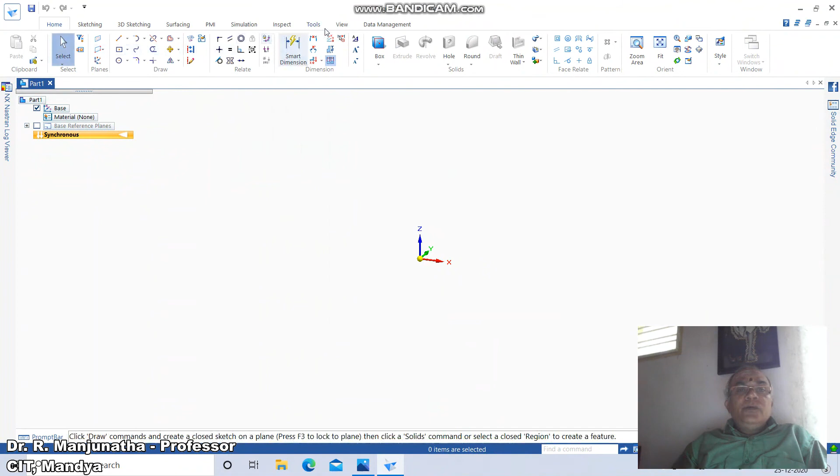So to do that, go to tools, click on ordered, and then disable base, enable base reference planes, then go to home, click on sketch, click on the right plane, and then click on project to sketch.

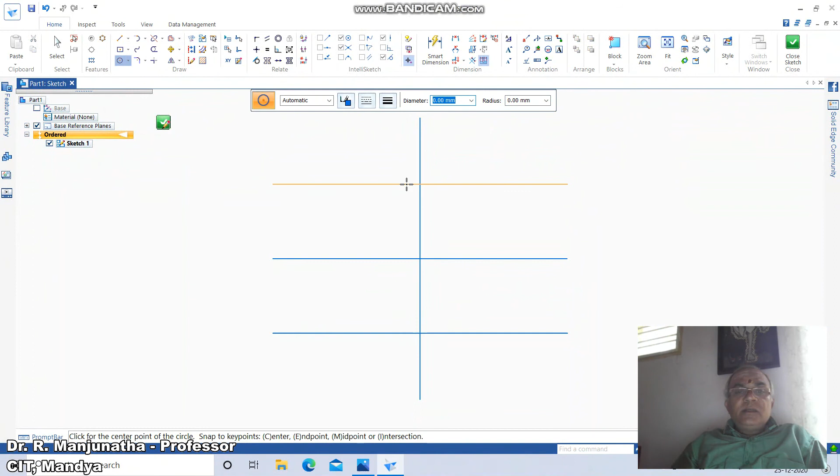So click on OK, you select these two lines, then go to offset, take the distance as 30, select on this side and also on this side, and go to circle, take the intersection of this and take the diameter as 20, because the radius is 10, so you take this also, then go to offset, take the offset distance as 10, and you select it on this side and on this side.

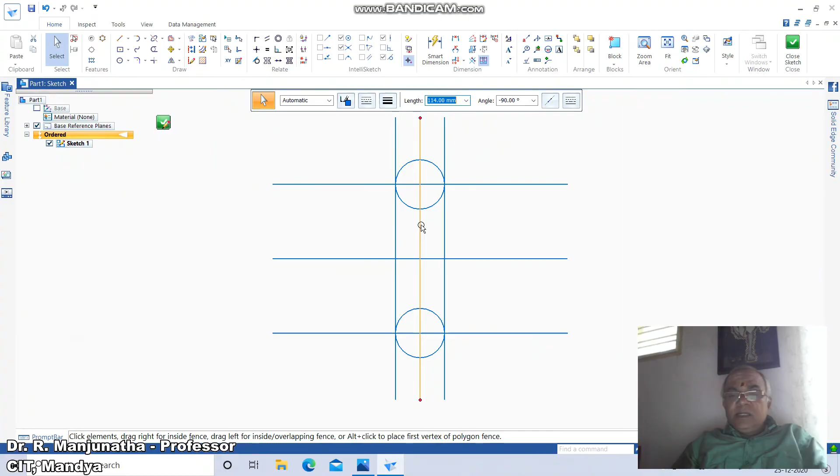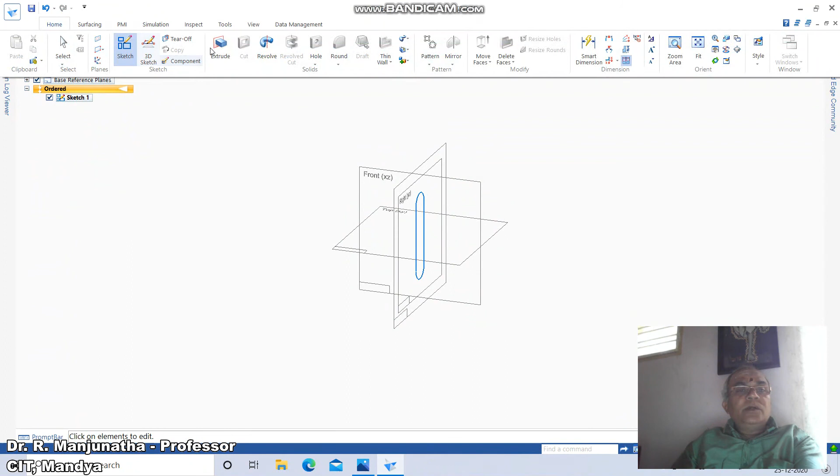Then go to select and delete these center lines, then go to trim it on this and this, and similarly you delete this line and trim it here and here, and then go to close sketch, then go to home, click on extrude, click on this, accept it and give the extension as 22, accept it.

Then go to finish. Now we'll go for the next option, which is I need to create this cross section which has been given here, which has got the extrusion of 33 mm on either side. So to do that, I'll go to sketch, click on front plane, and then go to project to sketch.

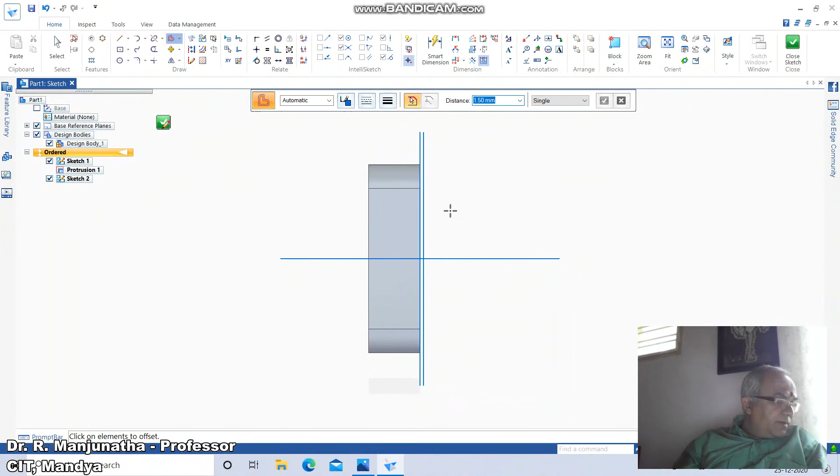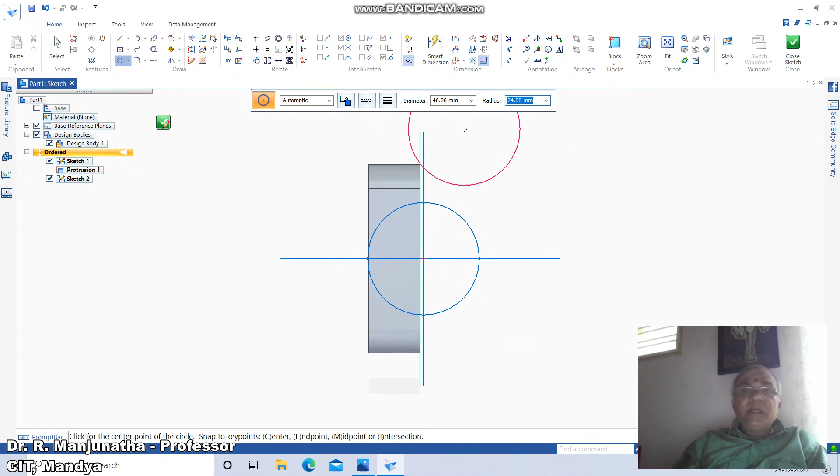Okay, you click on this, and here he says take the offset distance as 1.5. You take it from this side, and then go to circle, click on the intersection point of this, and here he has given diameter 48. So here the diameter is 48. Then again you need the radius of 29. You just give 29 and click on the same intersection point, that is the center point.

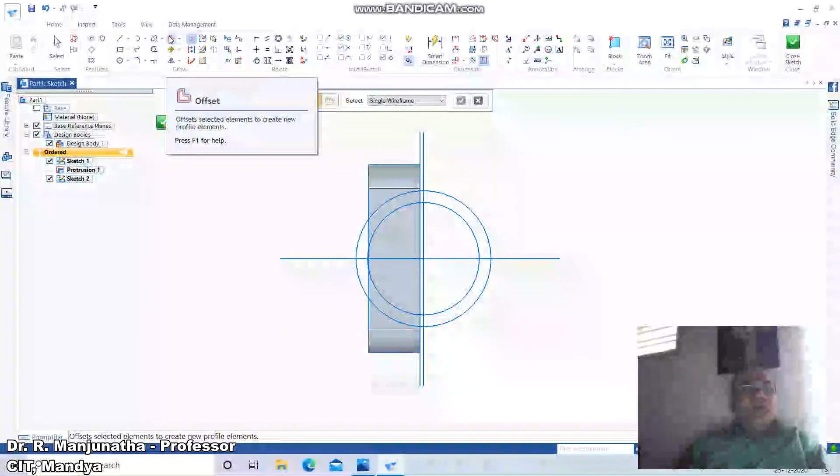Then on either side, go to project to sketch, click on OK, you just click on this, then click on this and also on this, then go to offset, you take the offset distance as 3 mm. We can see here this distance is 3 and this distance is 3, so take the distance as 3, and offset it on this side and also on this side.

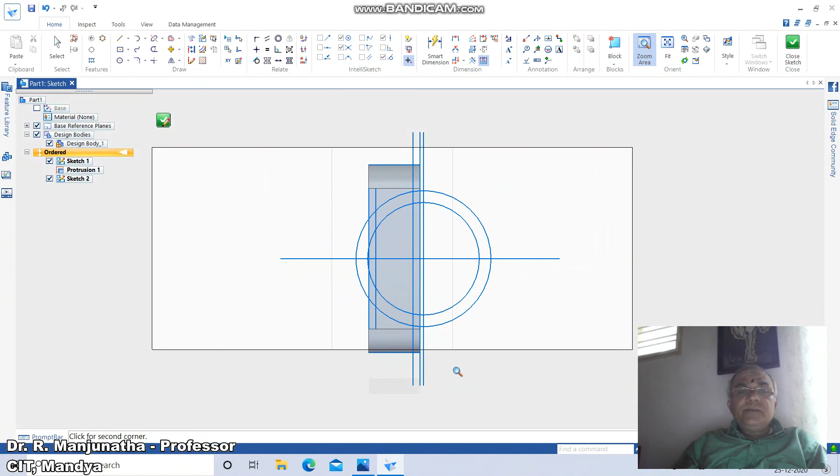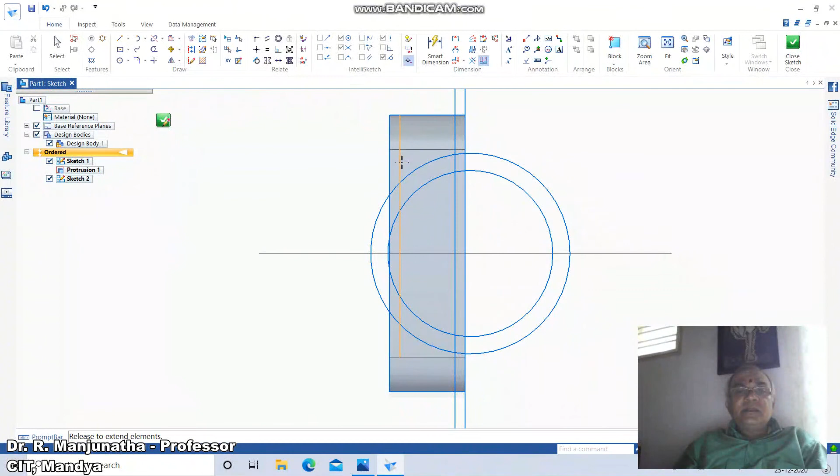Then go to zoom area, and bring it near to the screen, and you delete this line, it's not required. Similarly, it's not required on this side. Then go to trim corner between this and this, and between this and this. Then go to extend to next on this line and also on this line. Then go to trim this portion and this portion and this portion, and this and this and this, you trim it.

Then go to zoom area and bring it near to the screen, and then go to trim on this and this and this, similarly on this side. Sorry, you just go to extend to next. So now this portion is over, so go to trim here, then go to trim corner between this and this, and between this and this. So what we are trying to do is join the vertex points so that you get a single entity.

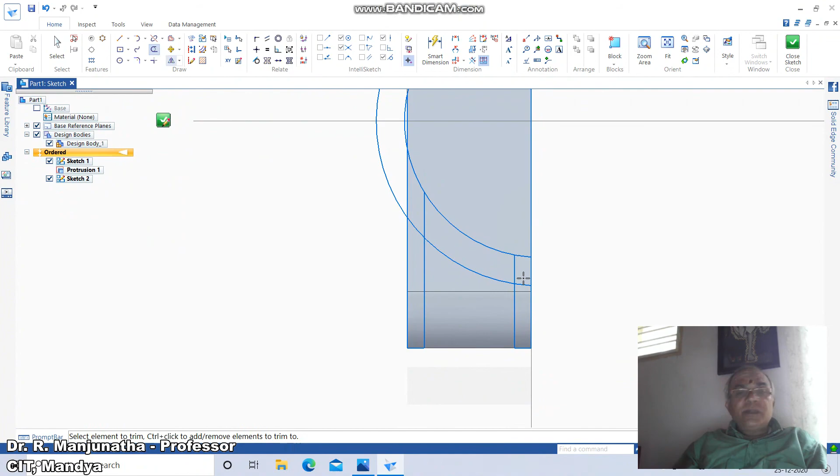Once you do that, come down to the bottom area here. Again you do the same thing. Go to trim, it is already trimmed here. You just trim this portion and also this portion, and similarly, go to extend to next on this side, and then trim this portion like this. Similarly here and here and here. Control Z. So go to trim, trim this line, Control Z. So trim this portion. Okay, now you trim this portion.

So again you need to join trim corner between these two, between these two, between these two. What I'm trying to do is just create the portion which is required for joining, so that means the zoom area.

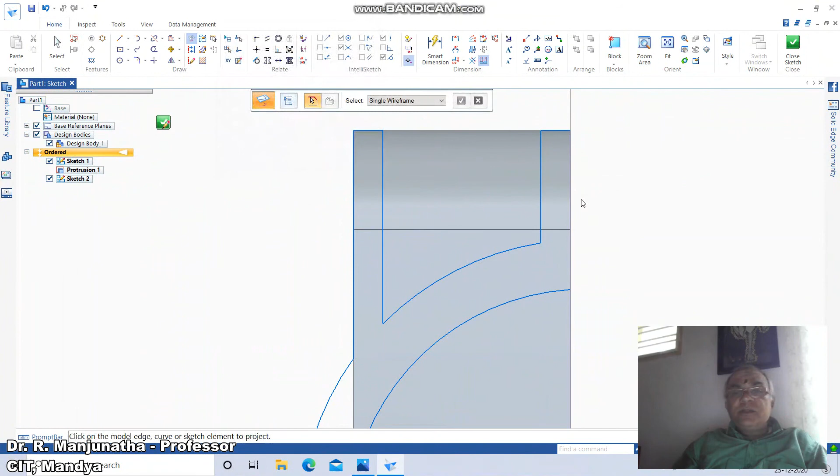Here we need to create this now. So you go to project to sketch, accept it, click on this, then go to trim corner between this and this, between this and this. Now that we've created this particular area, go to close sketch.

Then click on home, click on extrude. Click on this profile, accept. Go to symmetric extent on either side and then give the value of 33. Then you will get this portion. Then click on finish.

So once you do that, the next portion will be to create this profile and take out this portion. To do that, I'll go to home, click on sketch, click on this, then go to circle, take the center point of circle of radius. Here what he has given is diameter 20.

Then go to project to sketch, click on this and you click on this, then you click on this. Then he says it is of the radius of 30.

So go to offset, take the offset command, give the distance as 30, and from here you draw this, then go to trim corner between this and this, this and this.

Then go to line and click on tangent. Tangent is there, so you take the intersection part of this to tangent to this. Similarly, you take the intersection point of this to tangent to this.

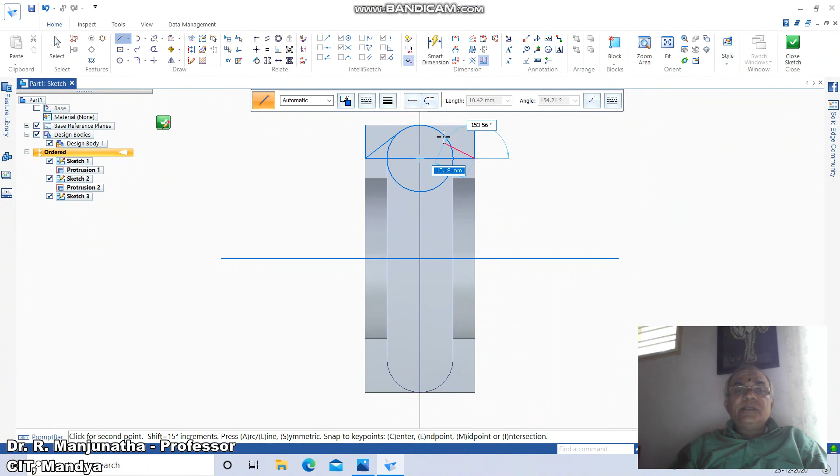Tangent. Then go to delete, select this portion and remove it, then take some arbitrary line somewhere here so that it is taken outside this box, and then go to trim this portion, and then go to trim corner between these two, between these two, between these two, between these two, between these two.

Now I need to mirror this. Just take the mirror command and take this as the window, select this, then go to select and remove this and keep it here. Then go to close sketch.

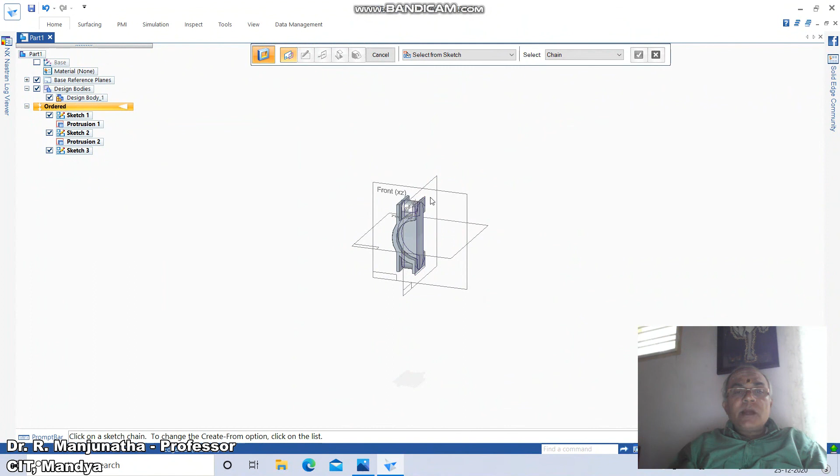So click on home, click on cut. Just click on this and also on this side, and cut it till here so that you are going to get the entire portion.

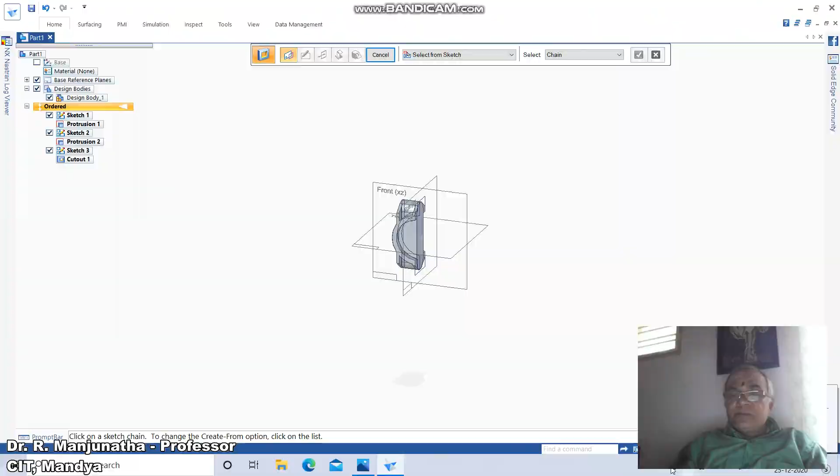Now we need to go for this portion, which is the rib, which you need to extrude as a protrusion. What I need to do, to do that, first I will sketch. So click on home, click on sketch.

Click on the front plane. Why do we need to take the front plane? Because it's exactly at this center. Since it's at this center, that center will be here.

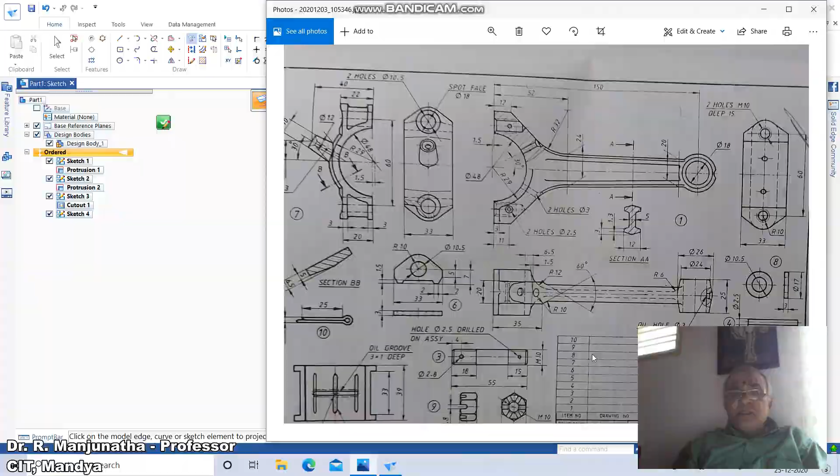So go to project to sketch, click on OK. Click on this horizontal line and this perpendicular, that is the vertical line, and the reference of this hole or this protrusion is 13.5 from the horizontal and 40 mm from the vertical.

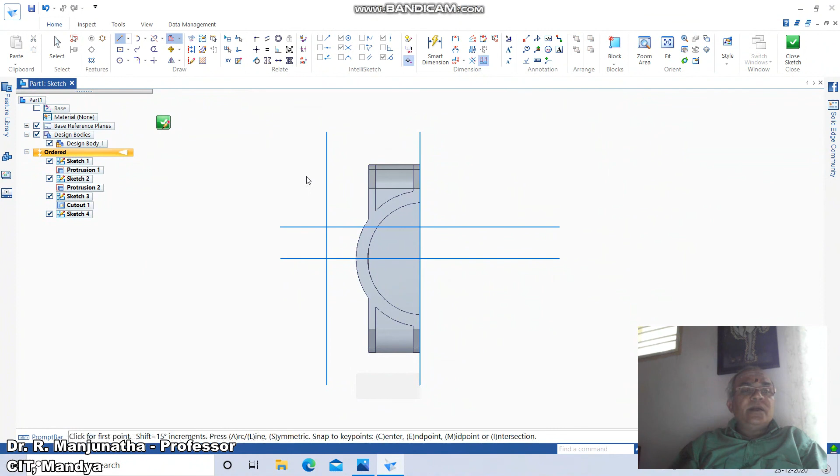So you just go to offset, take the distance as 40. From here you take the distance and then you have 13.5 from the horizontal direction, and then go to line command and draw a line from intersection to take around 100 mm distance.

Angle is minus 30 because the angle he has given is minus 30. So with reference to the vertical, the horizontal also will be minus 30.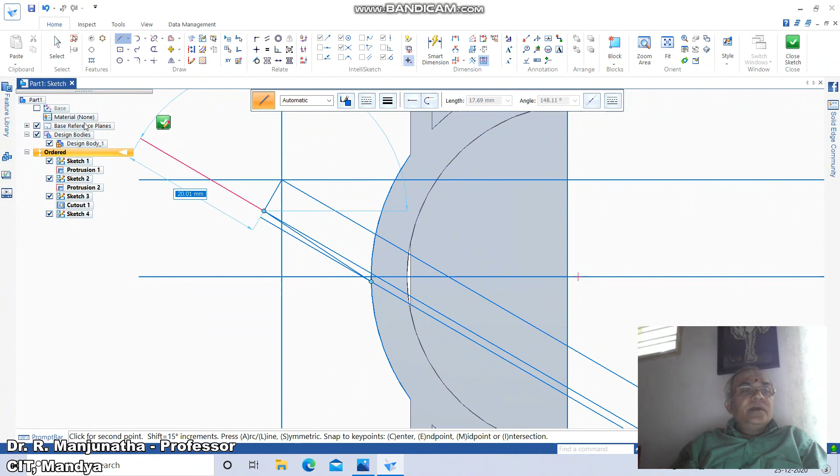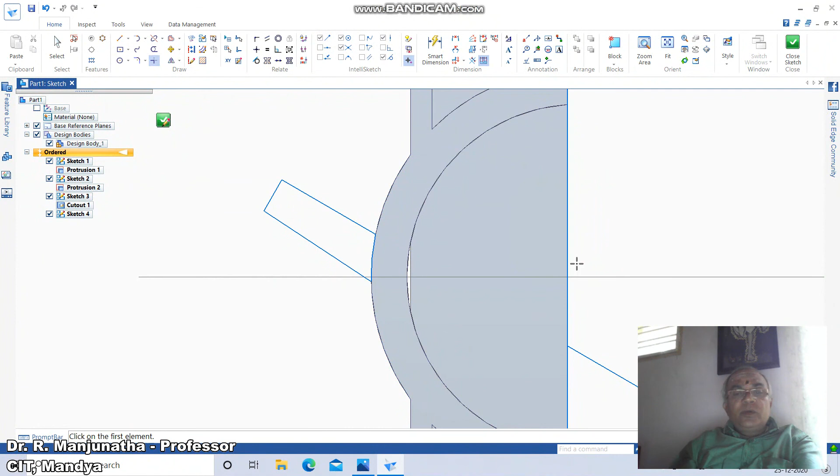Then go to select and remove this line, and similarly remove this line, and remove this line, which are all the ones not required. Remove it, then go to trim till here, and then trim the corner between these two, and between these two.

So once you get this, delete this line and also delete this line, then go to fit and see if there are any other lines remaining. No, there's not. Just go to close sketch.

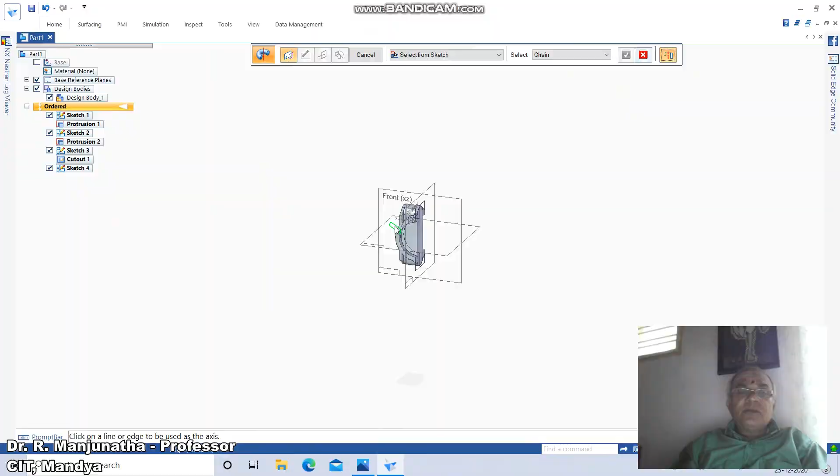Then come down to home, click on revolve protrusion. Click on this, accept it, click on this reference axis, and revolve it to 360 degrees, then say finish. This is how you get this portion.

Now we have done till here. Now I need to create a hole here. Go to home, then go to hole, click on this plane, and then click on this.

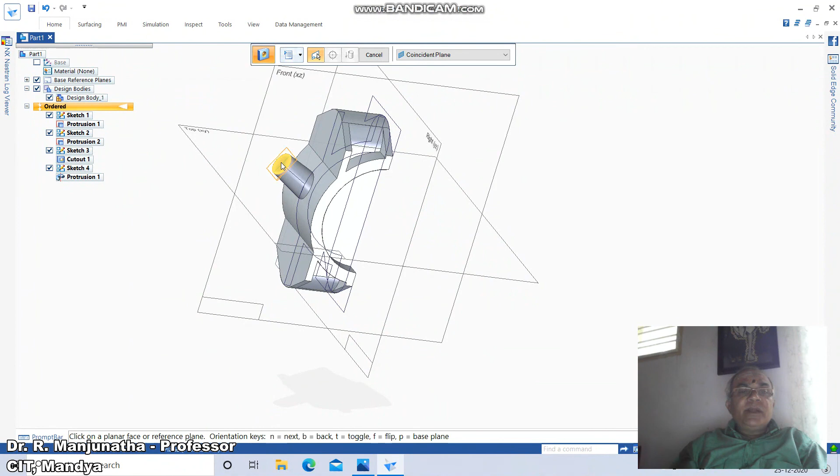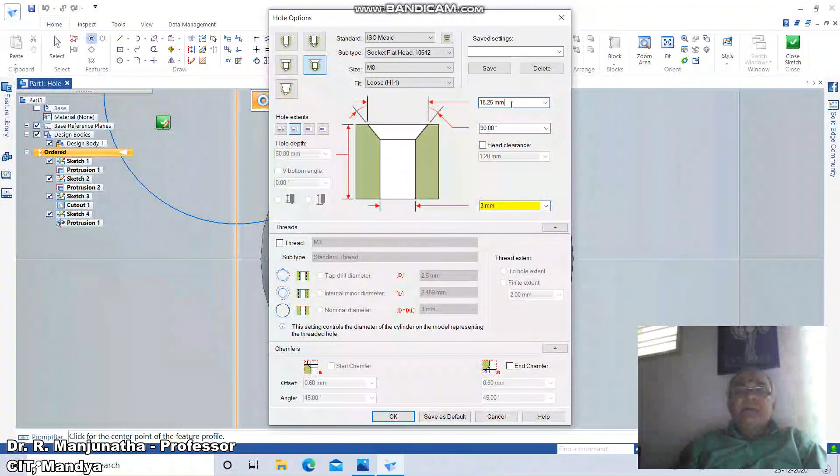Come down to the hole option, countersunk. Take the countersunk diameter - the diameter of this hole is 3 mm, and then the countersunk diameter is 5, and the countersunk angle is 90 always. Then click OK - why is it not a valid input? It says the diameter is 3 and the countersunk diameter is 5.

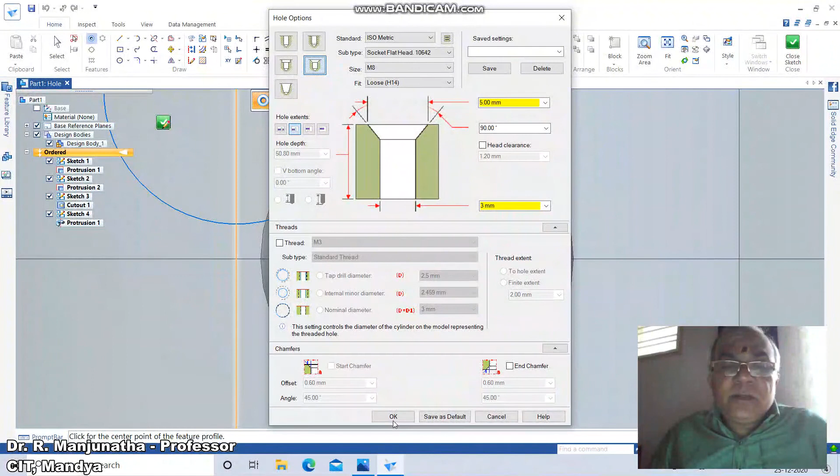Come down to ISO Metric, then come down to countersunk, click over this - all options, go to countersunk, and the diameter is 5, and there's the countersunk angle. Click OK, then come down to this, take this intersection, click close sketch and say finish. So once you get this, now we go for the hole.

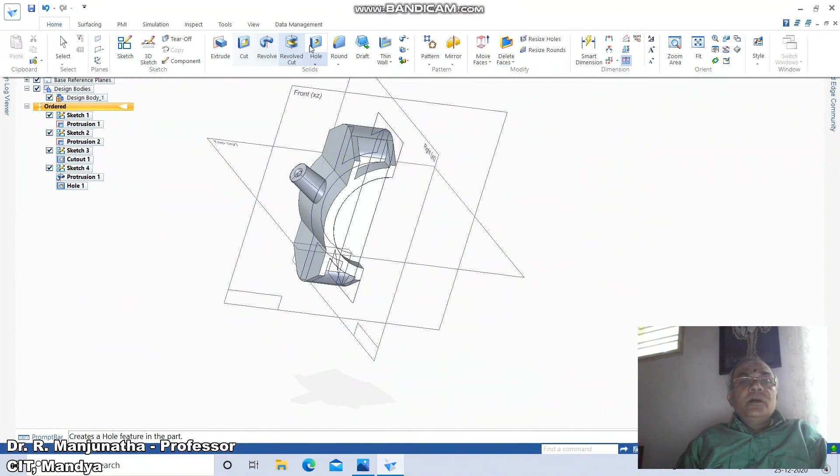Again go to home, click on hole, click on coincident plane as this plane, then come down to this. Again take countersunk. This diameter is spot face of diameter 18, and this inside diameter is 10.5.

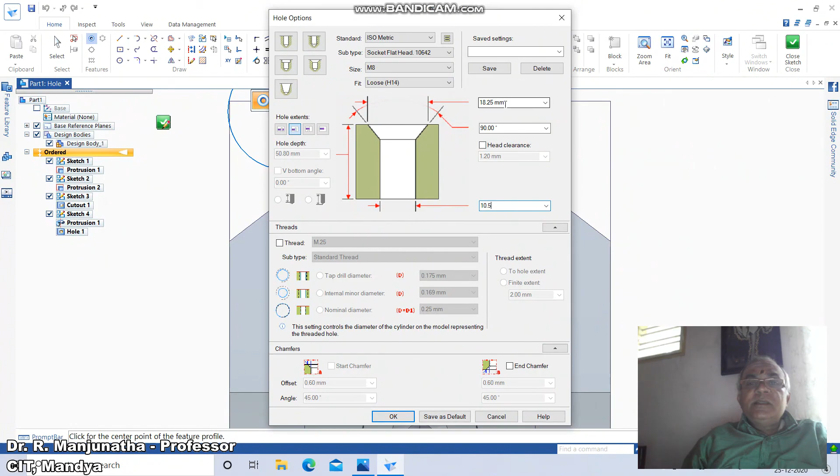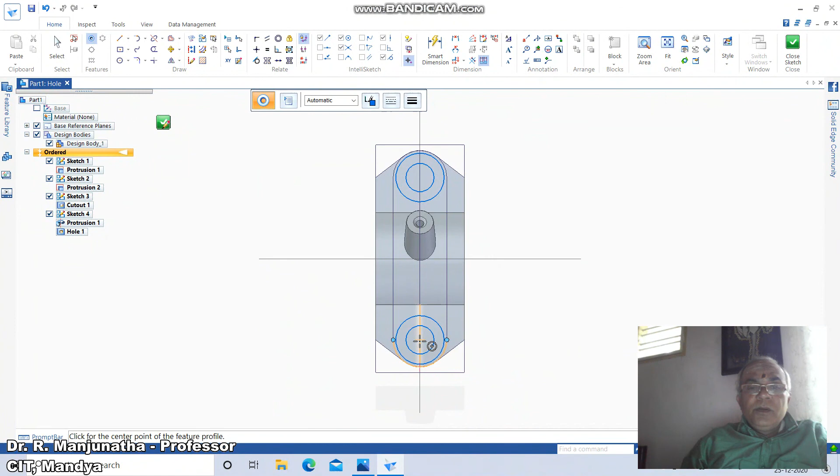So take this as 10.5, and then this as the diameter, which is spot face to diameter 18. Type 18 mm, and the countersunk angle is this. Click OK and take the center point of this, and similarly when you fit it, take this countersunk of this also. Once you get this, click close sketch and click finish.

Now we got this. Then go to fit, then go to rotate. Now when you rotate this, you have this hole.

Now again we need to do this operation - go to home, click on hole, click on hole options, planar face on this plane, then come down to this, and here I need to go for a hole. Since it is a simple hole, what I need is the diameter of 48 mm. We need to consider this 48 mm diameter, and it is through next, or through all.

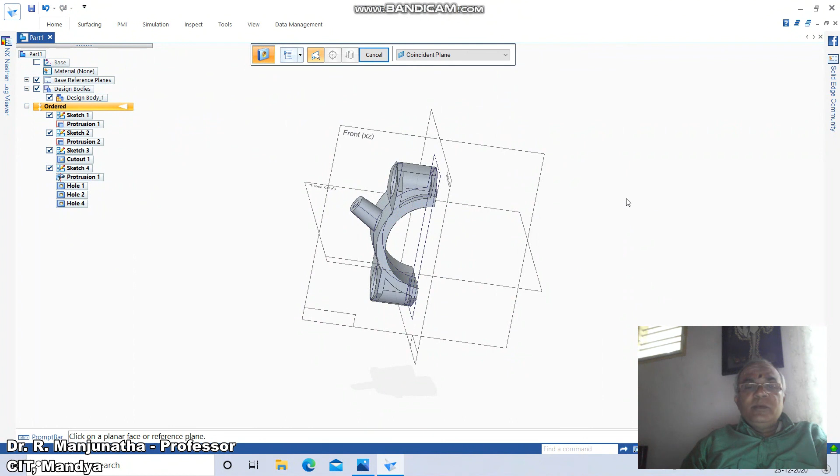Click over this and say OK, then come down to fit and take the center of this. Take the center of this, go to close sketch and click finish. So this is how you will be able to create this model, which is the cover.

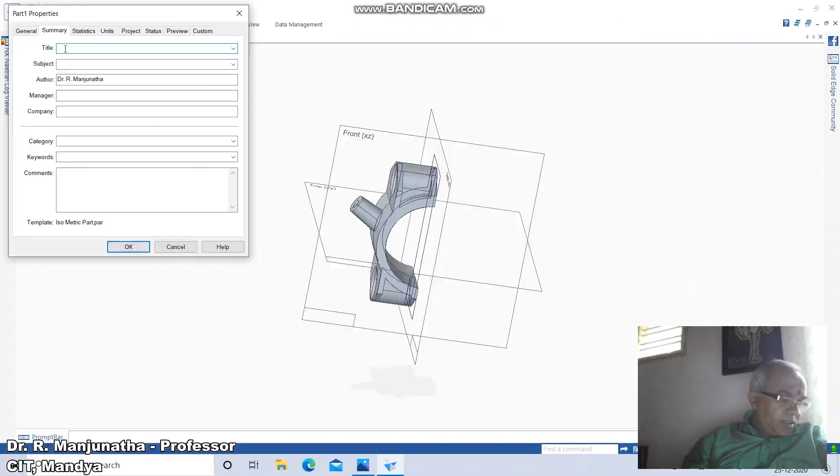So to do that, now go to the application button, go to information, go to material table or file properties, come down to summary. I want to type it as cover. Type cover here and say OK.

Go to application button, go to information and go to material table, click on Duralumin and say apply to model. Then go to file, save, come down to desktop, come down to connecting rod, part of this, type cover, and click save. This is how I can save the model.